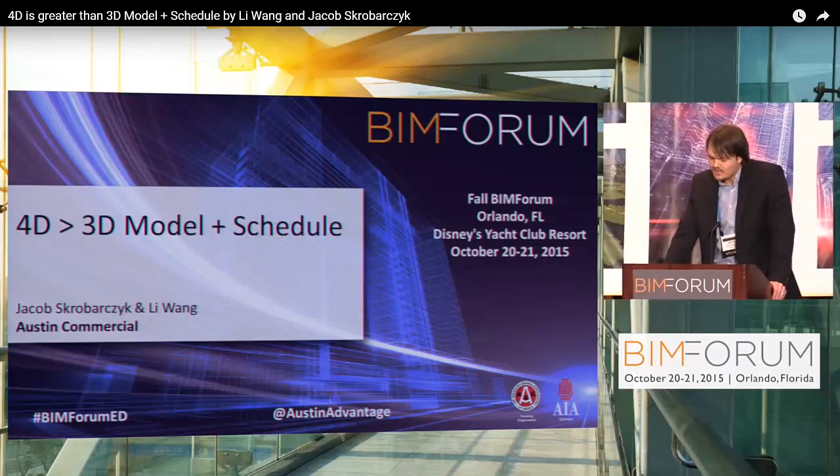I'm the VDC manager for Austin Commercial Central Texas Division. I'm a civil engineering graduate from the University of Texas, and I've been with Austin Commercial for 8 years. I credit the timing of the start of this movement, the BIM Forum, with really jump-starting my career. I've learned a lot from these events. I actually attended John's BIM 101 course in Dallas in 2009. And the BIM Forum has always had an impact on me, and I'm hoping to return the favor today.

My name is Wang. I graduated from the University of Texas at Austin, and I met Jacob 2 years ago at the Austin BIM group when I gave a presentation on my research on design coordination and how to manage knowledge in design coordination using data mining.

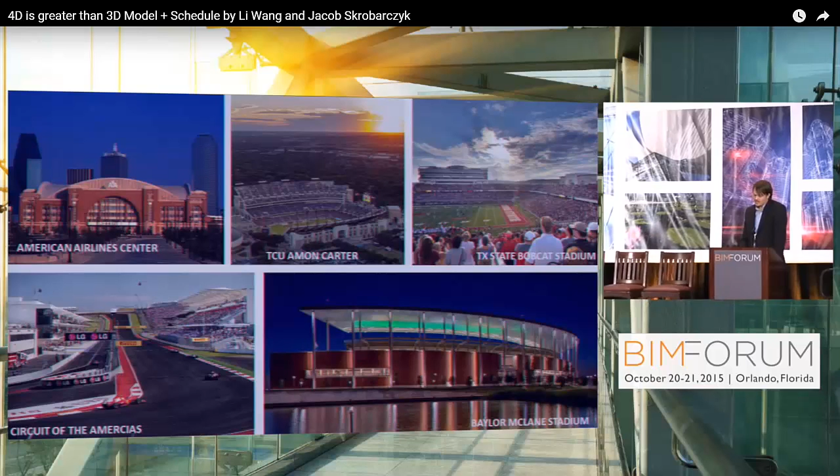For those that aren't familiar with Austin Commercial, we are one of the largest CM firms in the nation, in particular Texas. Our parent company, Austin Industries, which includes commercial, bridge and road, and industrial, put in place about $2 billion worth of work in 2015. We built the only F1 racing facility in America, the Circuit of the Americas. We built the largest replacement hospital in the U.S., and we're currently building the largest commercial build-to-suit project in North Texas for Toyota.

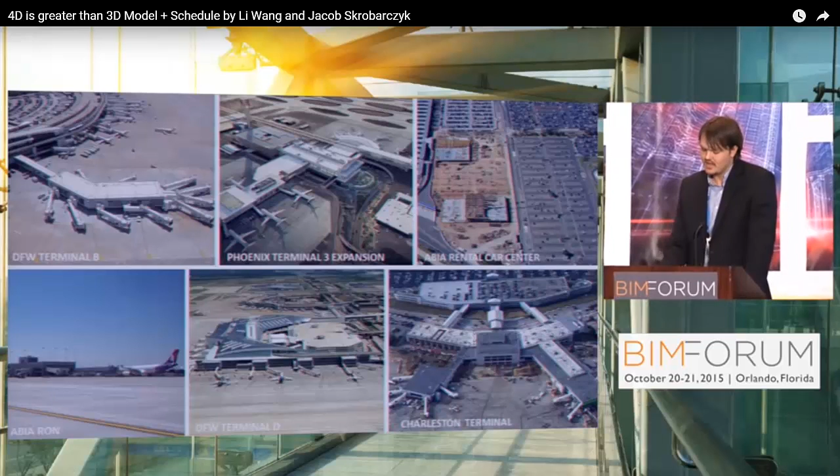We're the third largest aviation builder in the U.S., and we're using 4D to visualize the schedule, and it's really transformed our ability to communicate.

We're going to show today how 4D visual planning tools and practices impact pre-construction in several rapid prototypes or rapid fire case studies and demos, from communicating microschedules to our bidding subcontractors to collaborating with designers on just-in-time design.

We are finding new ways to use 4D for everything: planning org charts and managing resources, reviewing air rights and license agreements, and collecting data to help build better schedules by tracking progress visually and analyzing productivity.

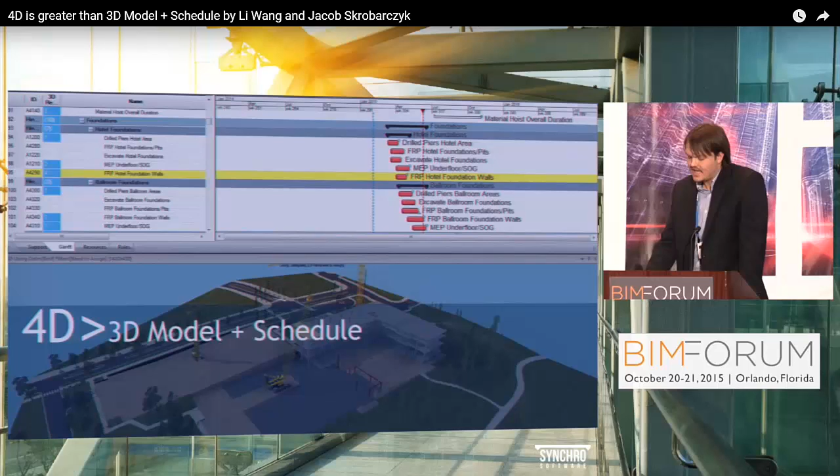Finally, we will argue that the power and future of 4D is not simply linking the schedule to the model and watching it. It's taking that visual reference point and then analyzing other project data over time in relation to that reference point.

So we'll go through several case studies. One of the unique parts of these case studies is that they're all within a 30-mile radius of Austin. As we progress through the case studies, you'll see how we built up our 4D portfolio by adding one building block at a time.

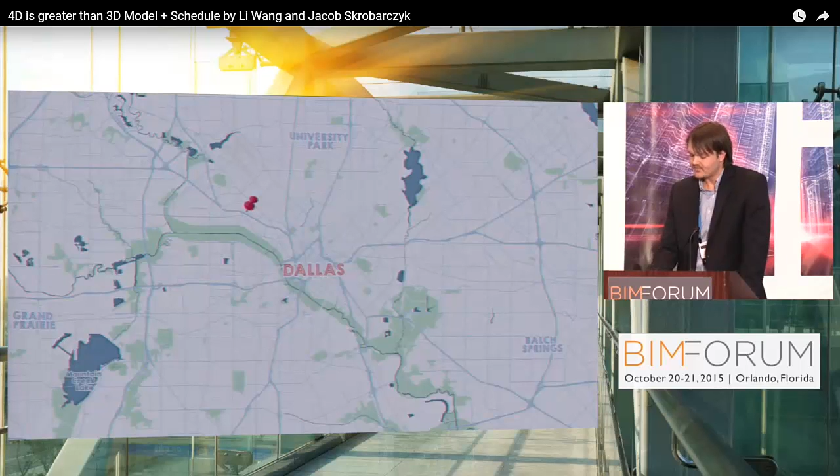Before we get to Austin, we'll show you a project in Dallas that really provided inspiration for our future work on 4D. That's the new Parkland Hospital in Dallas. In this example, it includes a few critical building blocks for successful 4D, a virtual mock-up, and heavy field participation. So 160 feet in the air, from levels 10 to 12, we have walls that span 120 feet and then end in this dramatic 60-foot cantilever. We define this as an area ripe for virtual mock-up, and it's a really high-risk condition.

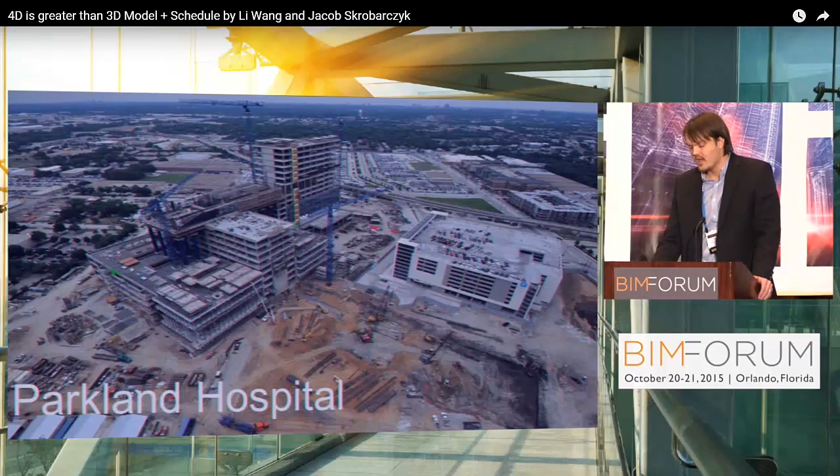We have 1 million pounds of rebar, and the cantilevered PT walls at Parkland are something that we wanted to focus on. So we actually hired a consultant, and they modeled the PT and rebar. But what's unique about this situation is that this rendering, the false work, all the scaffolding, was actually created by our field engineer, unbeknownst to our VDC department.

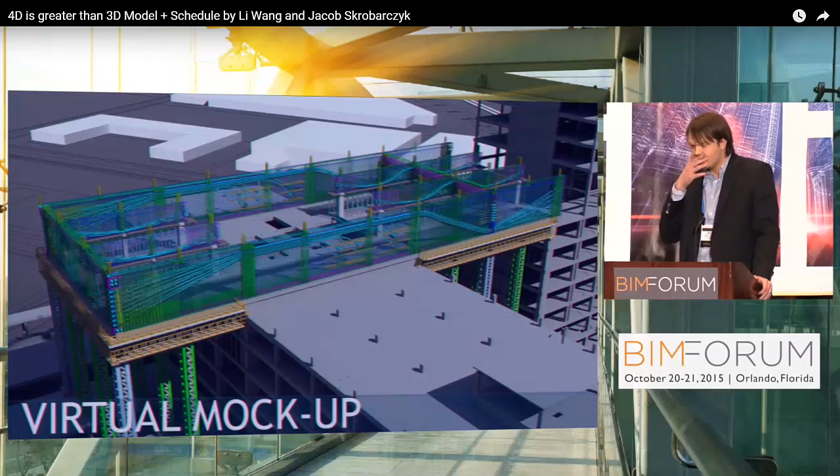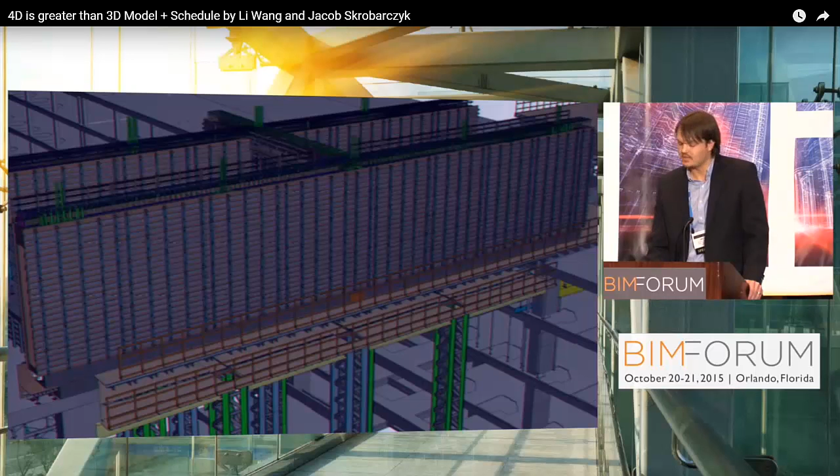It was an example where we had a guy on a project site that started to see what the power of 3D coordination is, and then took it one step further and decided, hey, I'm going to create this visual, create these animations, and then run through how we can build this in the field to improve productivity and really make sure he got it right from a field engineering perspective. I was really surprised because I struggle to make renderings look this beautiful, and this is a field engineer that kind of busted this out of nowhere.

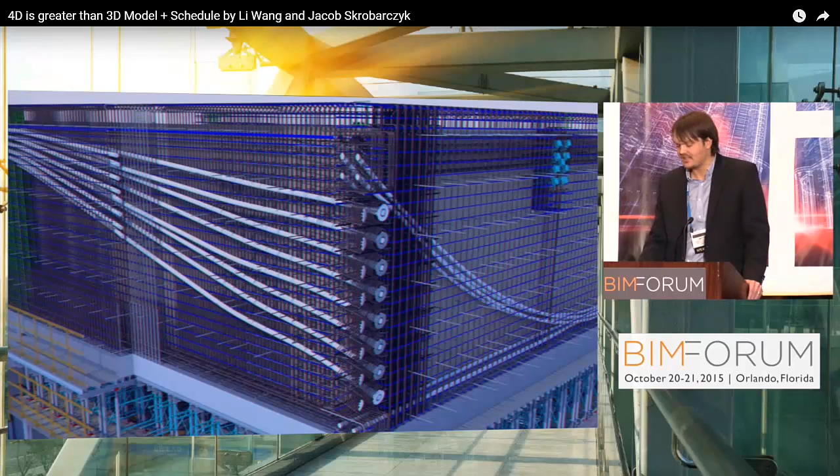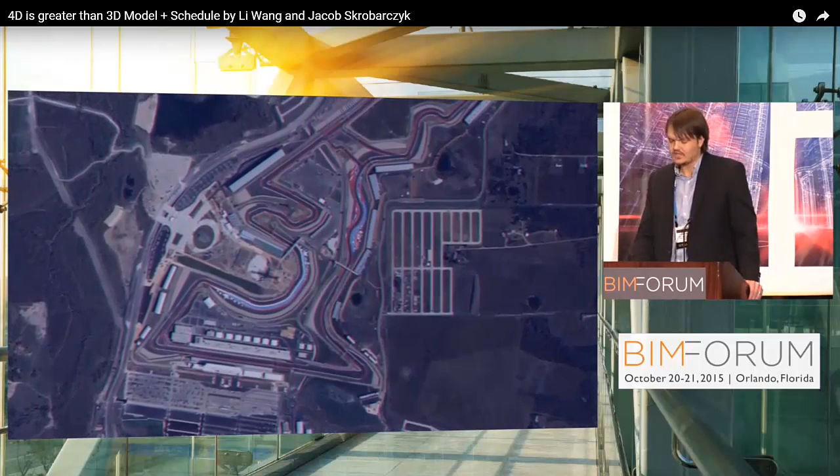So using that as inspiration, I started working on a project, the Circuit of the Americas, just southeast of the airport. For those unfamiliar with the project, Circuit of the Americas is a 1,500-acre sports and entertainment venue just southeast of the Austin airport. It's the most Instagrammed location in Texas. It's home of the X Games, Formula One, MotoGP, and a massive outdoor amphitheater.

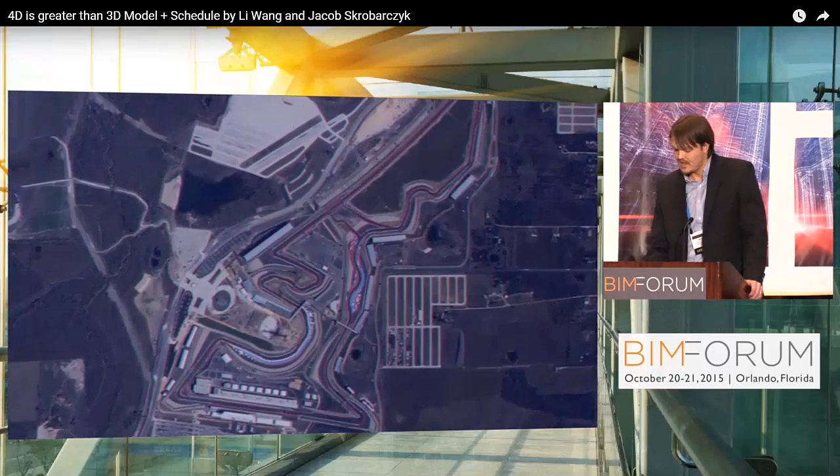The facility has capacity for 120,000 people, and it's the only purpose-built F1 track in the United States. This Sunday at 3 p.m., there's a race, the 2015 Formula One U.S. Grand Prix, on NBC.

Once the project got the green light, we were really schedule constrained. It was in October 2011.

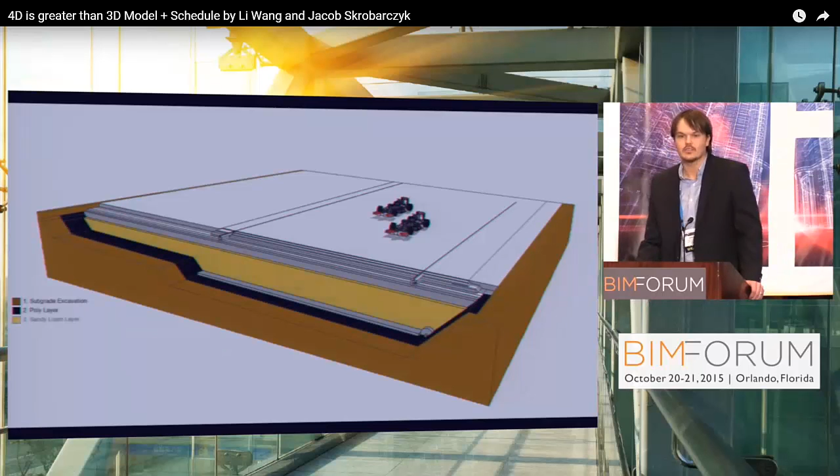We had 13 months to get race day ready. On this project, it was pretty easy to define what the high-risk repeating condition was. It was the 3.4-mile circuit track. We modeled every level of the track to discuss and define scope responsibility with our subcontractors, look at sequencing and durations.

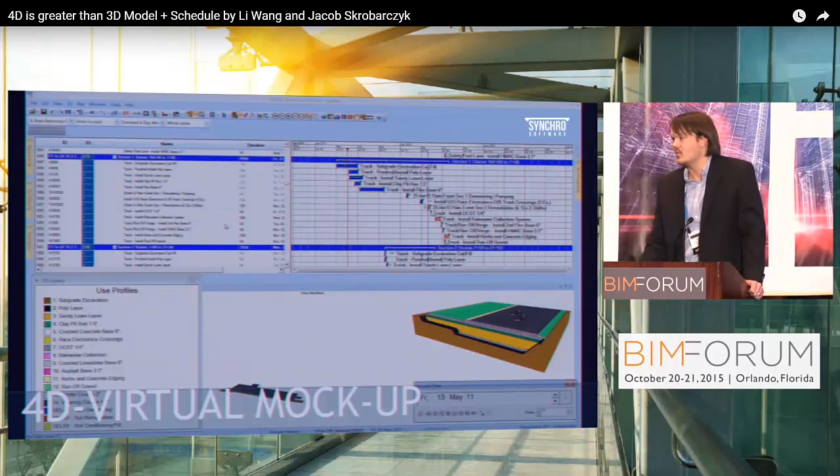One of the things we did, taking it one more step, was we tied the color-coded layers of the virtual mock-up to the schedule so that all team members could see the complex track design and understand if we were on schedule or behind schedule.

We were hit by heavy rains in January right before the track, and we were able to visualize within the animation when we were hit by rains, as you can see in blue, and then us recovering from those rains, and resequence construction so that we knew we could finish by race day. We were able to show ownership we would make it for that first race.

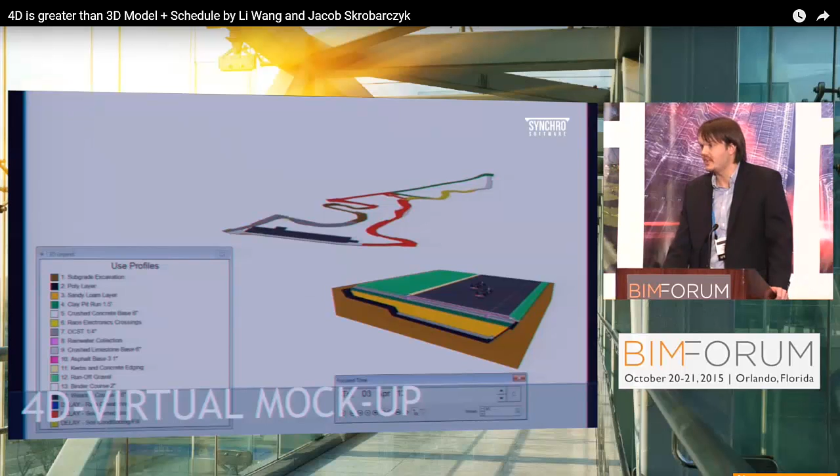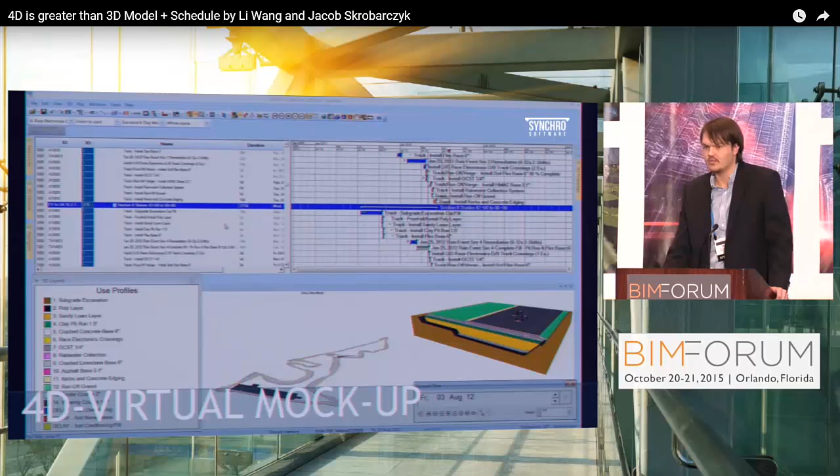Using these tools, we were able to create a job site environment where everybody was in an incredibly relaxed situation for having so much at stake.

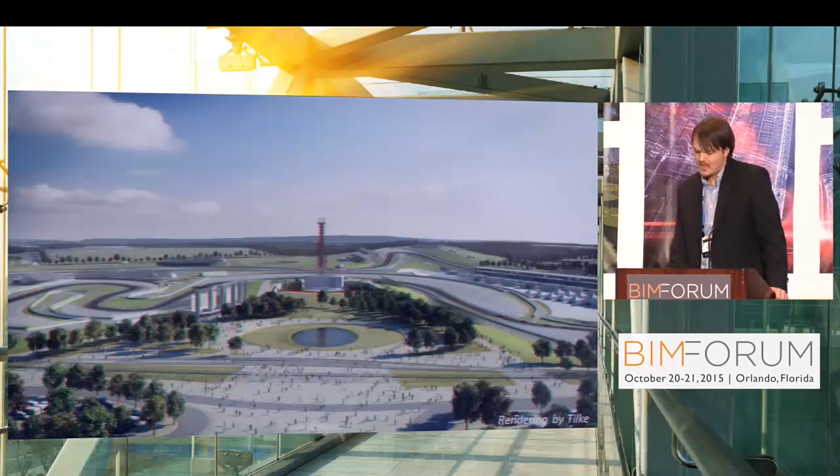While our virtual construction team was finalizing the coordination and planning the recovery schedule on the track, a major component was added to the project. We were challenged to build an outdoor amphitheater, concessions, and a 251-foot observation tower, and we had to do it all, design and construction, in 8 months.

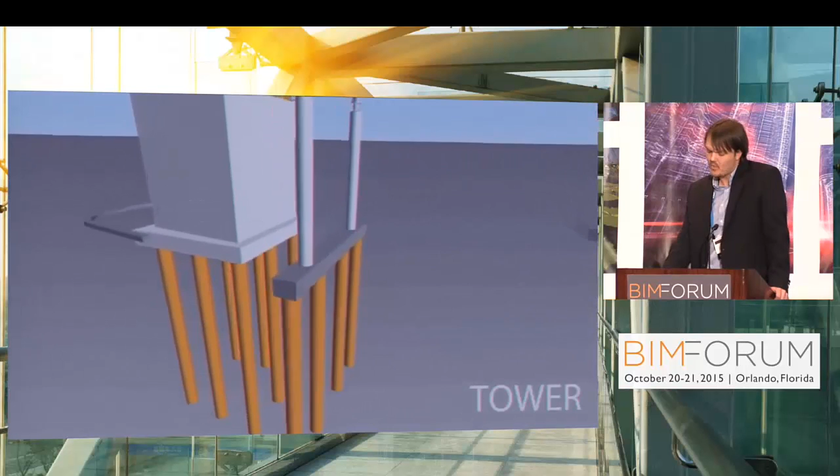So we worked with Walter P. Moore, and Walter P. Moore took the Miró Rivera design concept, which is basic geometry, and created a fabrication level model.

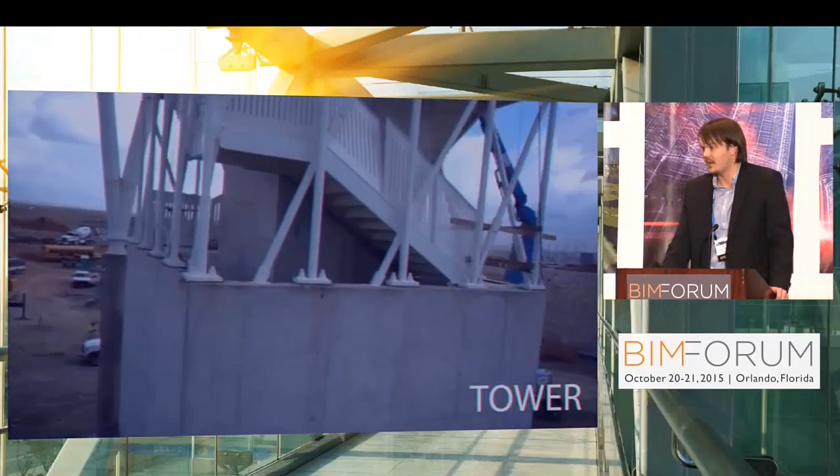We used the model to greatly improve communication and completely eliminate redundant detailing. We were able to save 6 weeks by cutting out the paper shop drawing process. With an over-the-shoulder review by our fabricator erector, the team took the design from basic geometry to fabricated steel on site in just 12 weeks.

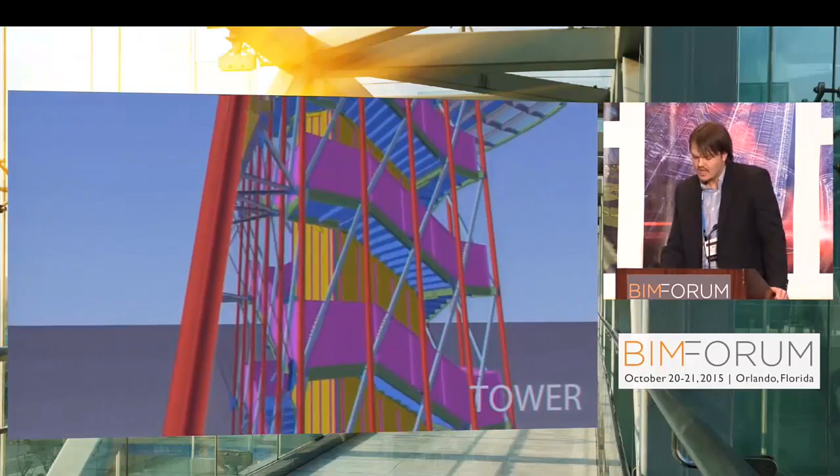The inclusion of that fabricator and erector in the design process was critical. Patriot Erectors provided feedback on what members were readily available and what connections they preferred for rapid assembly.

Ultimately, when we finished the project, we completed both design and construction in only 8 months, plus we had zero change orders.

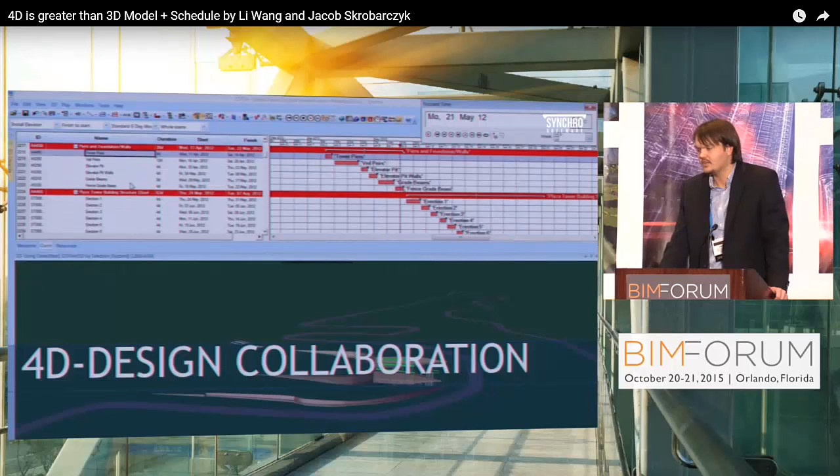Throughout the process, I was involved in the meetings to see how electrical, lighting, and all the additional smaller MEP components were used. But with our design team going all the way to a fabrication level, it really allowed me to start experimenting with using 4D on the tower in that amphitheater area.

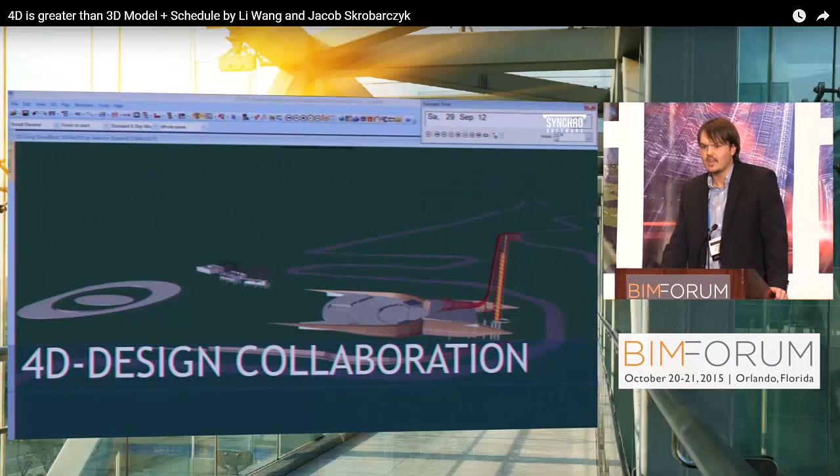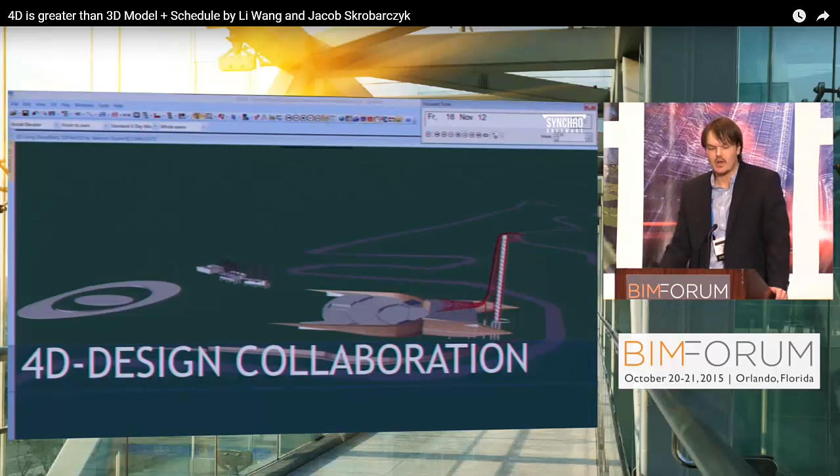Once we started showing the animation to the designers, Walter P. Moore indicated that they were actually a little bit behind on the veil design, and they needed to speed that up. We were working on the 7th module for the tower. This tower is erected in 10 pieces. If we would have erected that 7th module, the tower could have actually fallen down because of it.

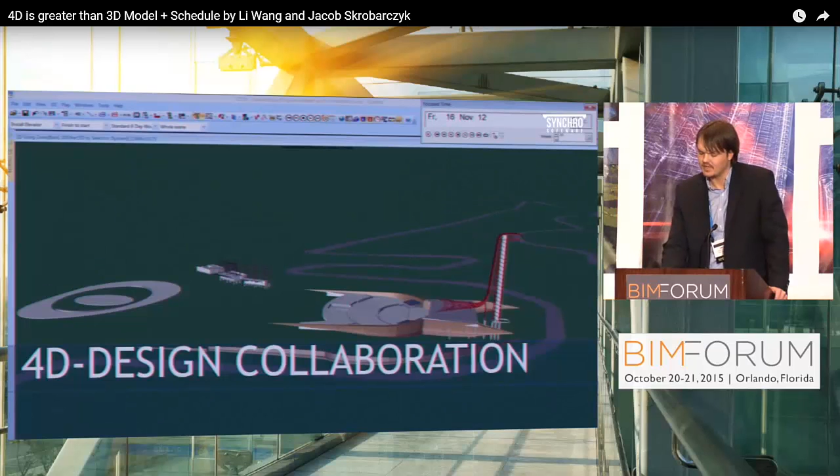They were able to accelerate the veil design schedule after reviewing the animation, and it really helped make sure this was a success. A lot was at risk for this to be completed in time for the first race.

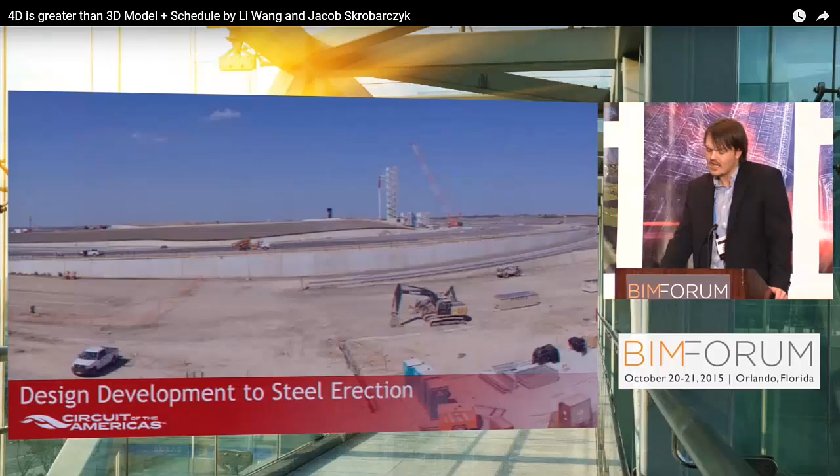With the steel on site, we assembled the modules of the steel lattice diagrid tower and erected it in 10 pieces. In early November, we completed construction of the distinctive red racing stripe veil, and it was available for the first race.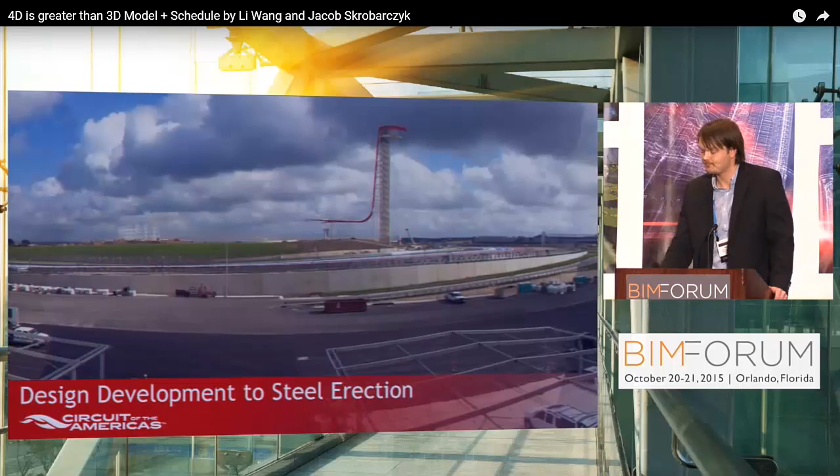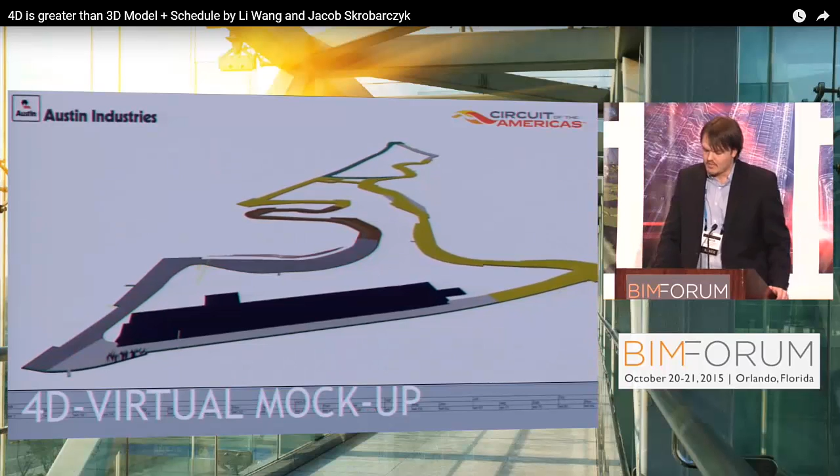Using visual planning tools, we were able to recover from extreme flood events to complete the facility on schedule for the 2012 race. The FIA, the governing body that oversees international motorsport, approved the circuit in late September 2012 for Grade 1 status, the highest distinction awarded to a motorsports venue.

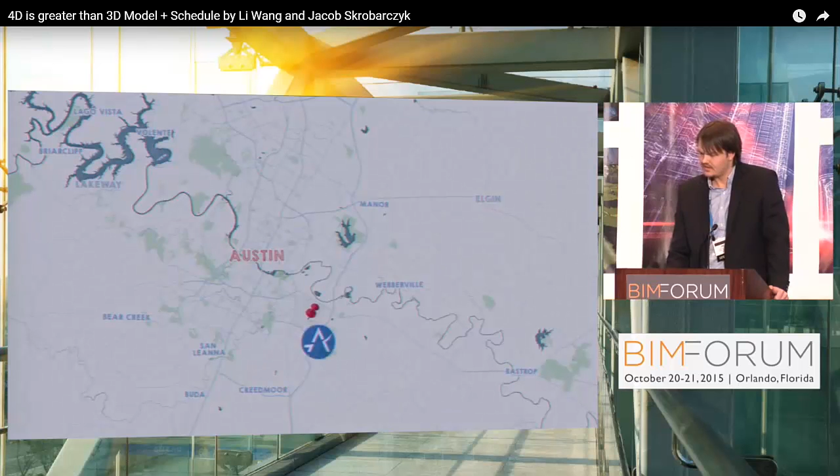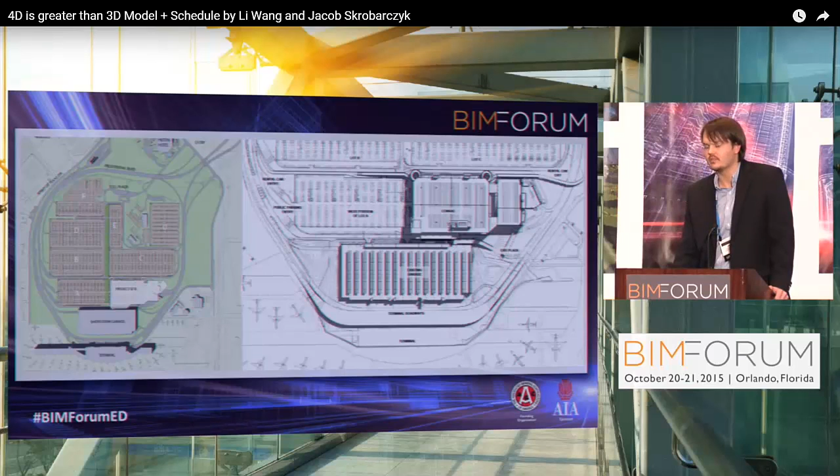So the team from the Circuit of the Americas went down the street to the Austin Bergstrom International Airport to work on a massive rental car center. We really wanted to apply all the same tools. It was an incredibly different type of project, but we wanted to keep the momentum we had built through that project. So one of the things we did is create a tower crane sequencing animation.

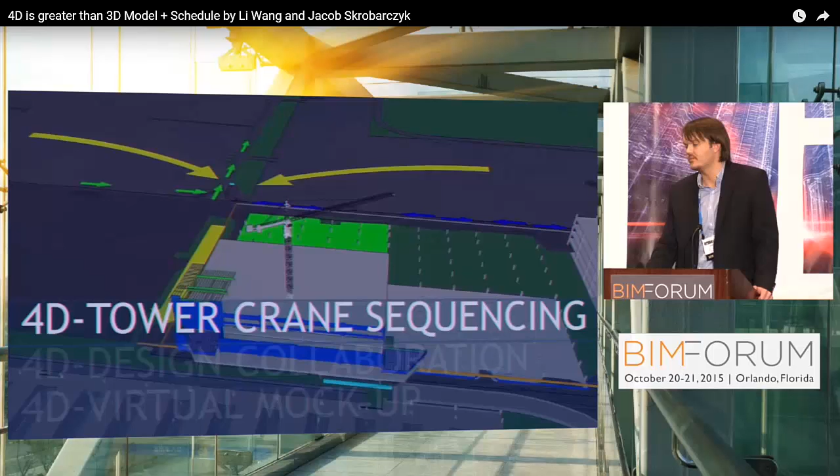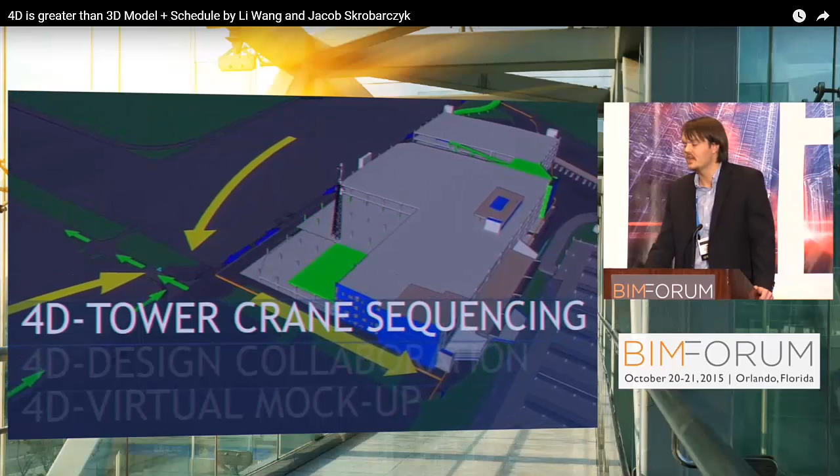The complex part about these projects is that you end up building them in zones. We created a tower crane sequence with 2 tower cranes making 3 jumps each time. We went through it with our superintendent and with the parking management at the airport. One critical thing is that to dismantle the crane to the bottom of the screen, we would need to shut down a roadway tying right into their toll booths. So the superintendent resequenced the work and came up with a sequence that made sense. We were able to time it so that if you're erecting and dismantling cranes 6 times, that erection and dismantle number goes way up.

So what we were able to do is time it so that we were dismantling and erecting a crane at the same time that we were dismantling and erecting another crane. We ended up saving $20,000 to $40,000 just by adjusting the sequence, getting a little mobile crane out there for a couple days and using it for formwork installation while we get going.

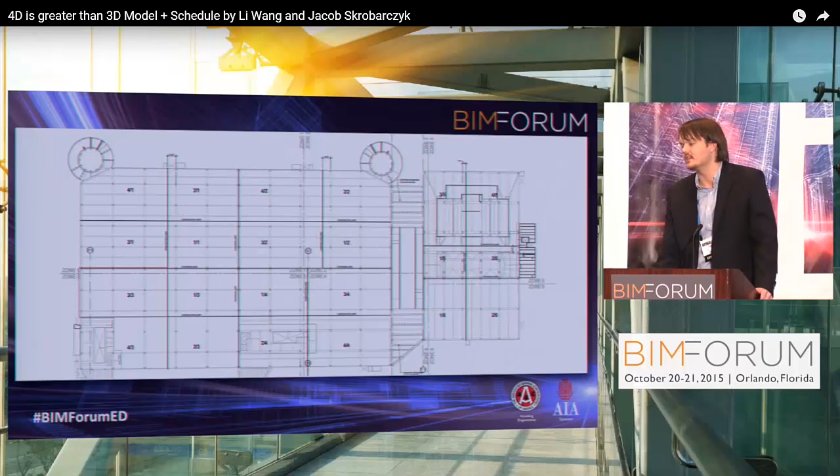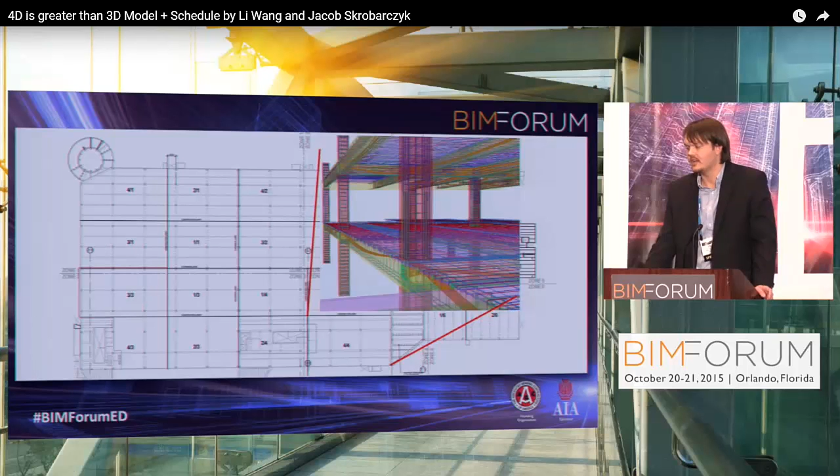Similarly, we identified a virtual mock-up case here, really a repeating condition. We have 5 levels, 1 million square feet, broken into 6 zones, with really four pours per zone. So the idea is this is the equivalent of like a 120-story building, except it's repeating and going horizontal. We modeled PT and rebar, identified how we would build one small section, and that informed productivity on the rest of the project.

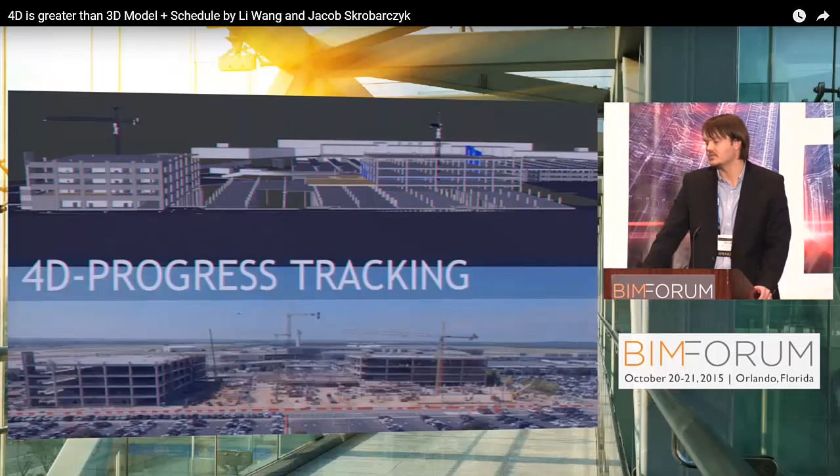Throughout the project, our superintendent was able to look at the schedule and compare our webcam versus the animation, and really force our subcontractors to stay on schedule, letting them know when they're ahead or behind schedule. We were able to do a great job of keeping that on track.

And then now, as that superintendent works, he's moved on to a similar project at Tampa Airport, and he's using this model, this 4D sequence, to inform the new VDC coordinator on that project on what he wants it to look like and how he's going to use it.

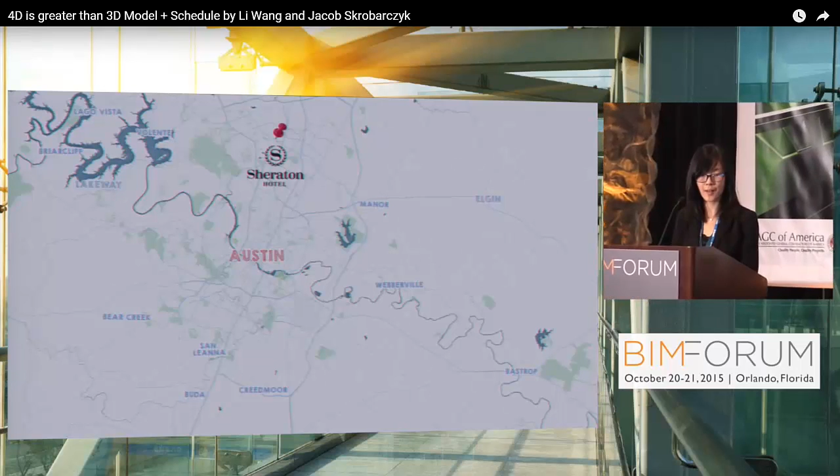Okay, so building upon the success of previous applications, we moved one step further on our next project, the Sheraton Hotel in Georgetown, 30 miles north of Austin.

On this project, the developer was particularly interested in reviewing the staffing strategies over time. So we incorporated the staffing information into the 4D simulation, and the visual creates transparency for the developer to understand where and when we spent money on staff.

On the other side, our regional manager was able to create a cost-efficient plan to adequately staff the project using this schedule visualization as a reference point.

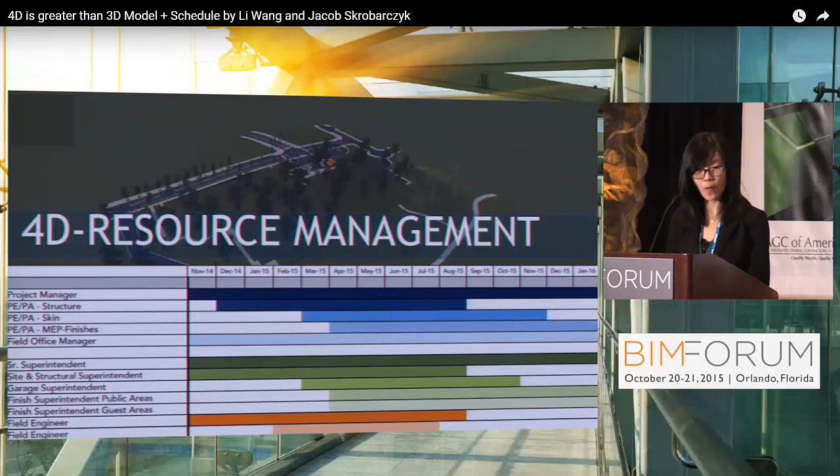Future plan is to apply 4D resource management on all of our projects to facilitate better communication with the client, improve feedback from and to the field, and also increase the overall predictability and efficiency in resource allocation.

And on our next project, we faced some new challenges in the Austin downtown area. The first challenge that we came across is to get the tower crane license agreement.

This is a traditional 4D animation that we created for the project. The city is concerned with the impact of tower cranes on pedestrians, transportation, and surrounding buildings. Our project manager spent months back and forth with the city trying to get the license agreement before he came to us for help.

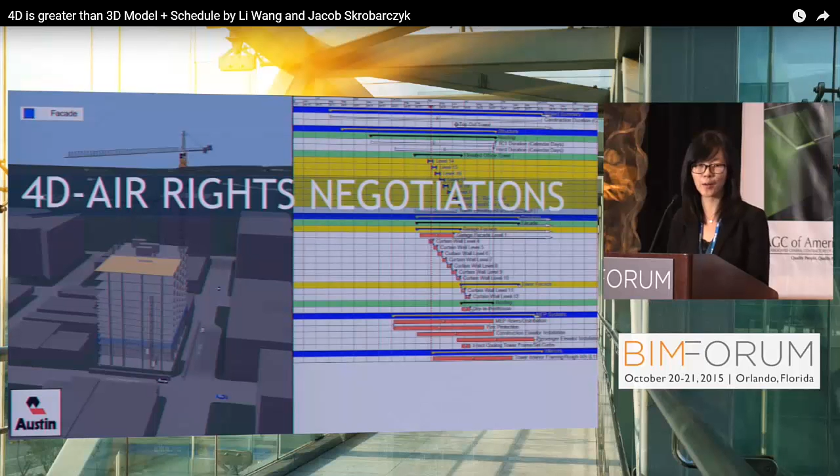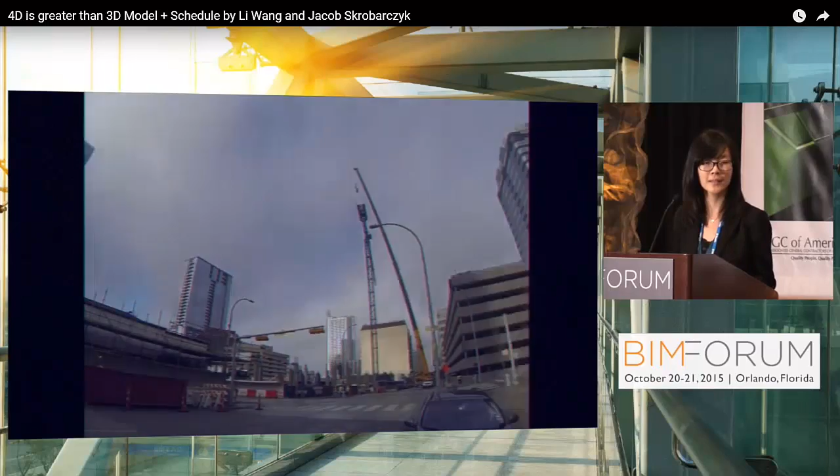So the previous animation wasn't good enough to show the tower crane movement, so we created this short and sweet 4D animation showing the maximum swing of the tower crane and the typical movement of the jib. Our project manager got this to the city, and we had our license agreement in hand within a week. And this is the tower crane being assembled on a lovely sunny day.

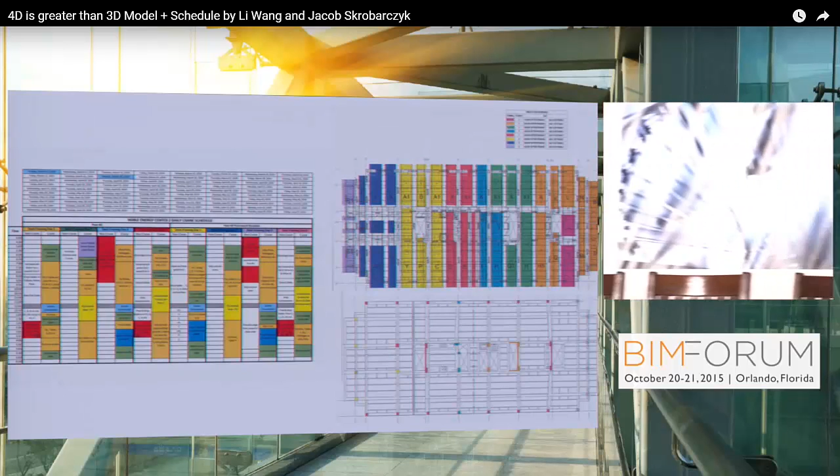So one of the other areas that we like to use 4D is in really planning formwork installation. We do a lot of self-performed formwork. This is a crane use log and really a formwork layout plan.

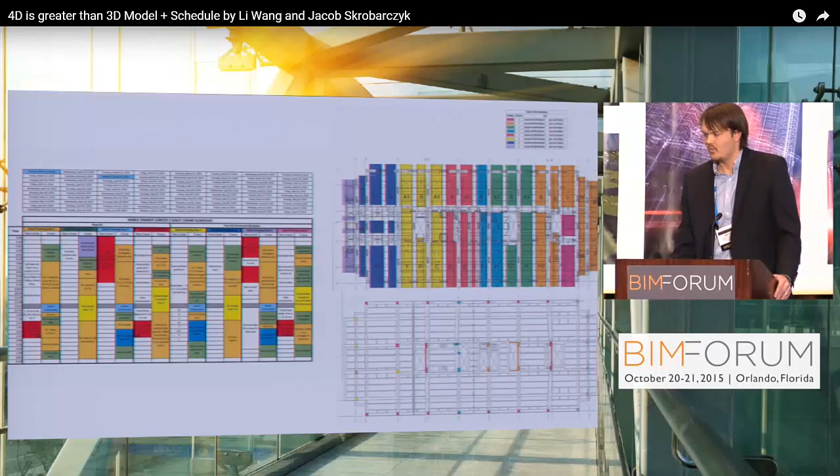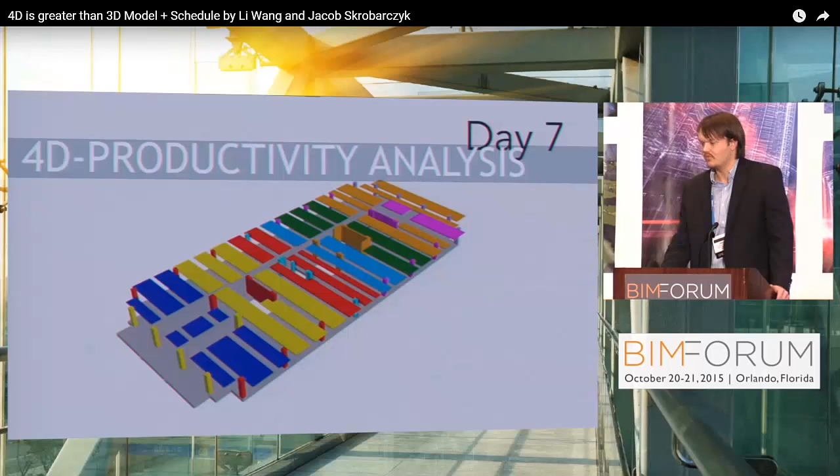What we're looking at here is trying to understand how our projects in Houston are getting really 3,600 square feet a day for structural productivity. What we're getting quoted in the Austin market is closer to 2,200 square feet a day, and trying to understand why that is.

So we started off by taking their formwork drawing and trying to make a clear visual of how they're doing it. And then we thought originally that we would just go to our formwork subcontractors and tell them, hey, you need to produce like this. Here's a visual, produce it.

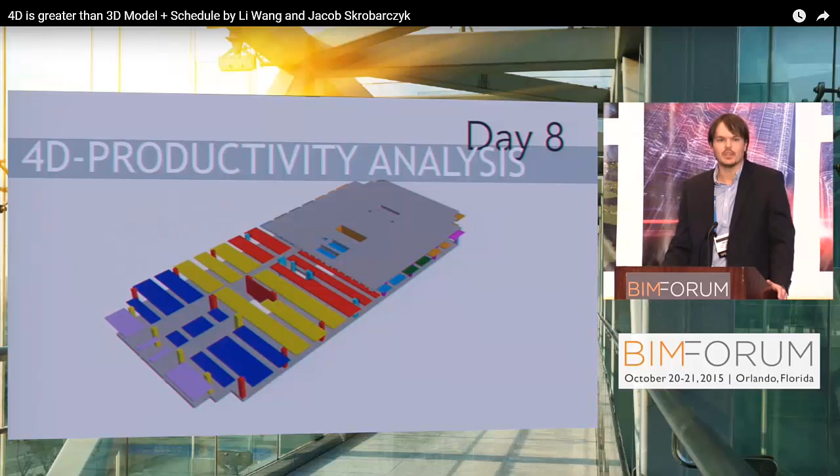And what we were able to figure out is that it had a lot more to do with shortage of labor and demand for workers, shortage of skilled labor than it did really anything that we could produce for them. The other piece is that they had questions outstanding. They had issues with beam schedules and rebar details and how to figure out how to put the structure together.

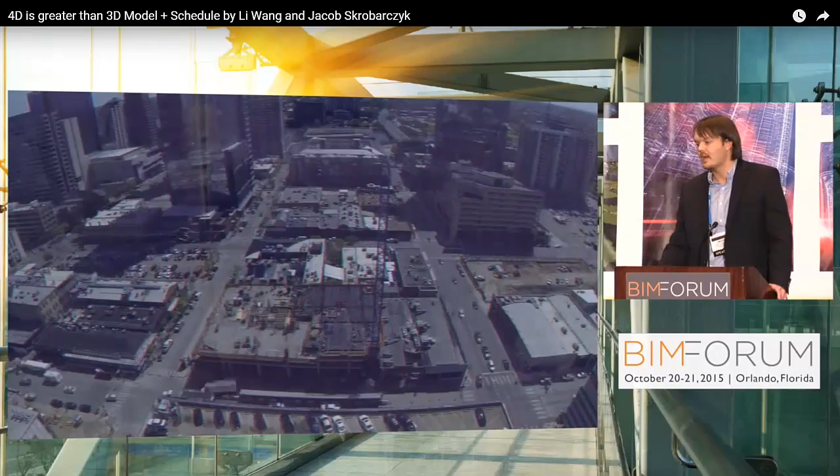So with our self-perform team, we're actually taking the time-lapse video and using it sort of like a game planning strategy. And so compared to our competition in the market, we're able to do about 2,900 square feet a day, which isn't fast by most standards, but within that marketplace, we're beating the competition by about 30%.

And so our formwork project manager really believes in the use of the model. He's an active virtual builder, and we're building structural models and finding those issues early. And it's really a way that we can really improve our productivity.

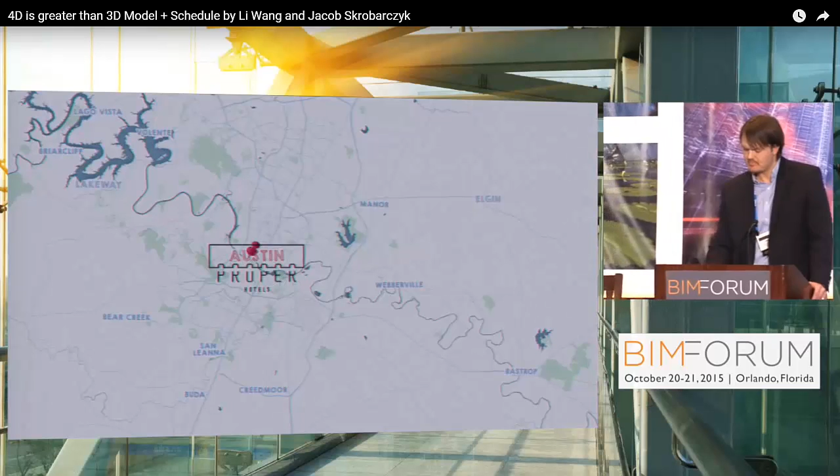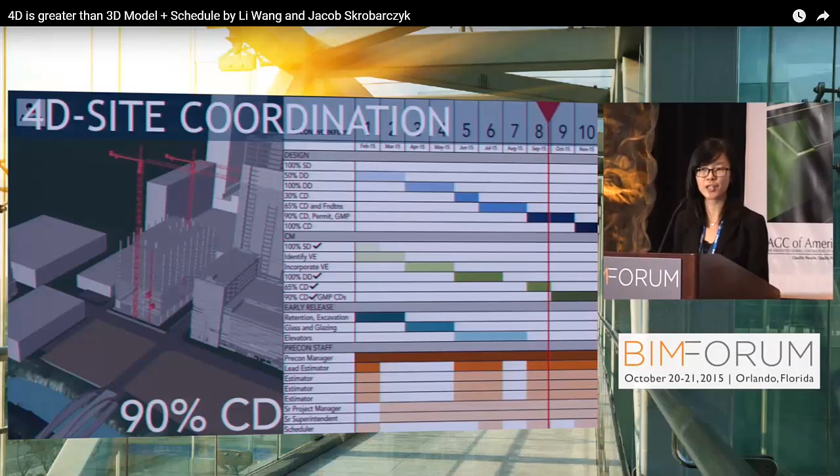So the midst of construction going on in Austin downtown is reshaping the city for the next decade, but also creating extreme challenges in construction. And so we're spending a lot of time trying to understand the site condition, our surrounding buildings, and trying to coordinate with our adjacent projects for tower crane erections and sequencing.

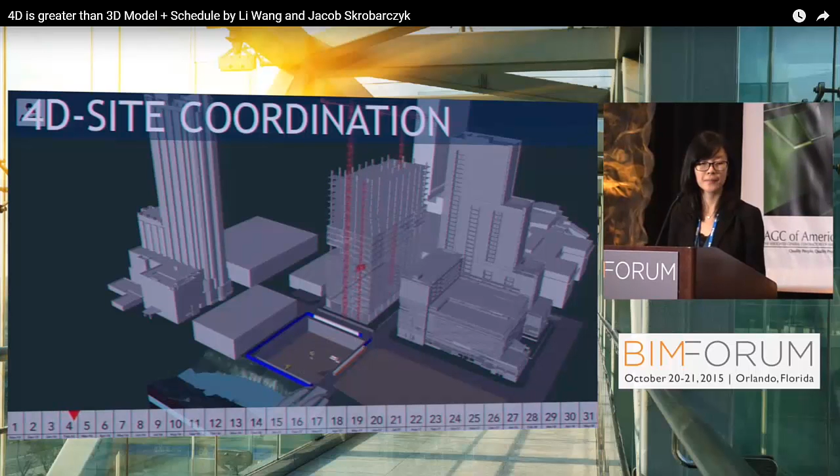And so in this animation, when we pursued the project, we put together this animation. We had multiple projects going on. We were looking at really tower crane placement in relation to the other projects. In a 2D perspective, it was really hard to tell when cranes would be there.

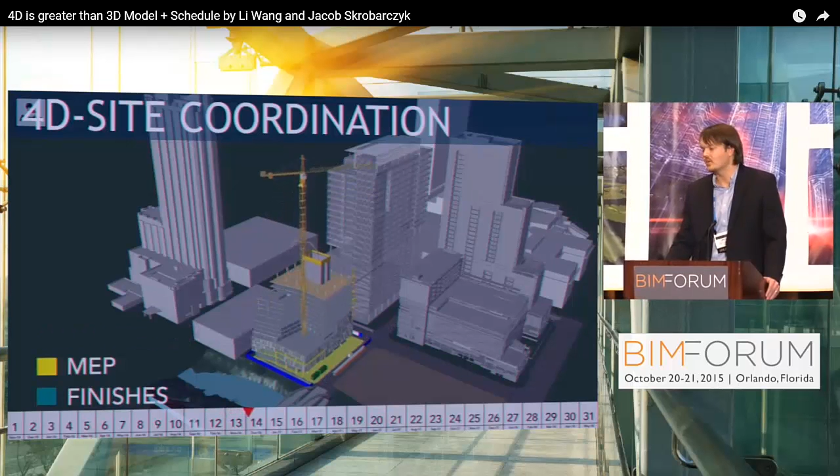We just got dumped with, here's logistics plans, here's schedules, go. So we were able to come up with a plan that worked. It seemed actually pretty easy once we got into it. And then once we were awarded the project, we set up a meeting with a developer that was working on a project just to the north of it.

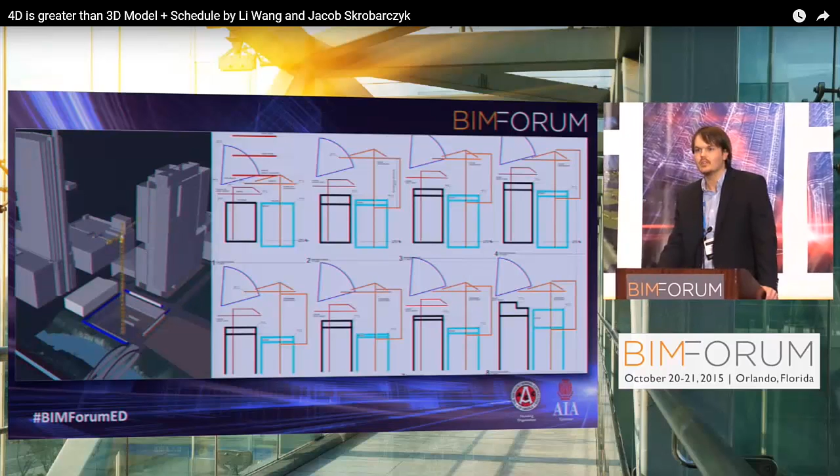They said it may concern you. So once we got their schedule and their logistics plan, we realized that although we started our project earlier than they did, we'd be 4 levels below when they were starting theirs.

And really they were using some productivity numbers that we would see more like in a Houston market or in a different market. So they're flying up with their structure and using 2 cranes, the lower crane, which would hit us if it was weather vaning.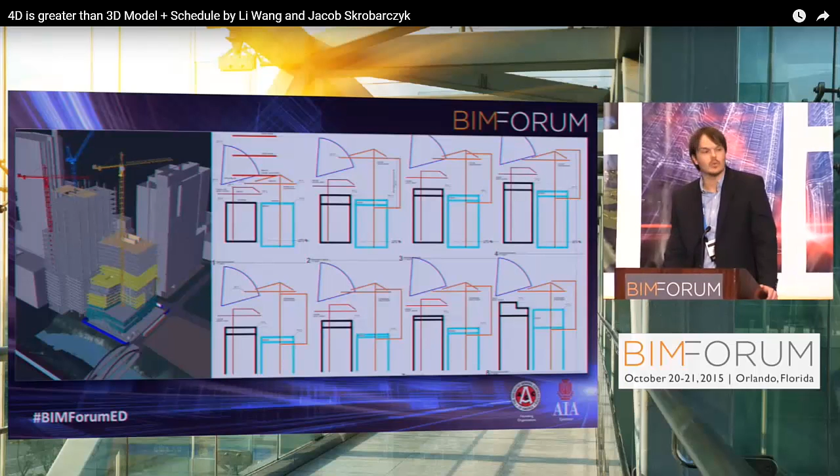So we had to go back to the drawing board, spend a lot of work on these sort of cartoon sketches to understand where we would be over time, and then use that to really plan a jump sequence that would work with their adjacent property and have our superintendent go into it with open eyes on what the challenges are to the project.

To summarize, our understanding of 4D is not only using the 4D simulation to represent the schedules, but also use it as a platform and a reference point to incorporate data for different uses.

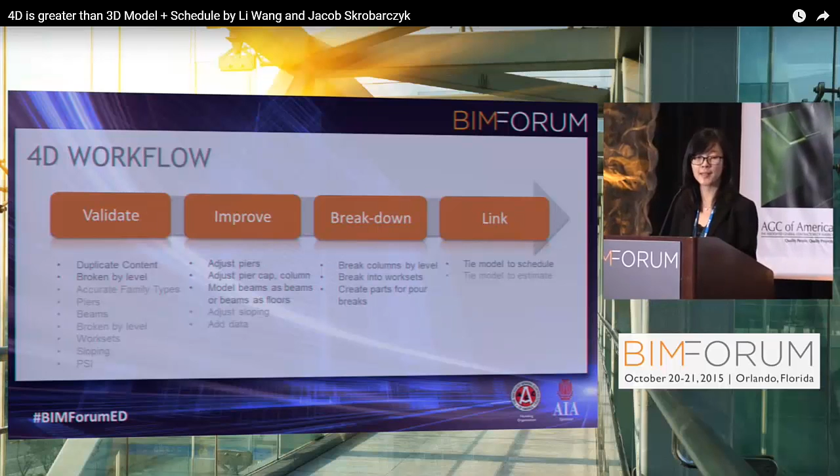And here is the typical workflow we developed for 4D. We broke it into 4 steps: validate the model content, improve the model, break down the model into the details that you need for your use cases, and link the schedule to a model. And this can be repeated as the model updates and the schedule updates.

And here are some best practices. First, important to identify the use cases you want to test out. And it's always good to test out one application at a time. Once you identify your use cases, it's critical to define the level of development of your model.

And the next important lesson learned is to determine the update frequency of not only your model but also your schedule, because the models and schedules always change. So that's one thing to keep in mind. And the last but the most important is getting more involvement, not only inside of the VDC department, but also outside of the department, from the field guys, from the project managers, project engineers.

And one of the examples of this attempt is trying to incorporate the safety data into 4D. This is research being developed by Sooyoung Choe and Dr. Fernanda Leite at the University of Texas at Austin. They are trying to utilize and incorporate this safety risk data into the schedules and showing the risk levels of work zones in 4D.

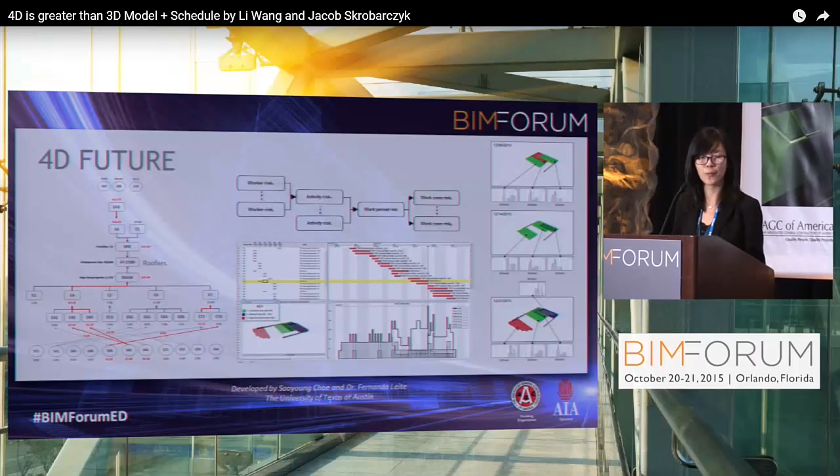And here's the animation that they created for one of our projects. Different colors show different levels of safety risk. Red is high risk, blue is medium, and green is low risk.

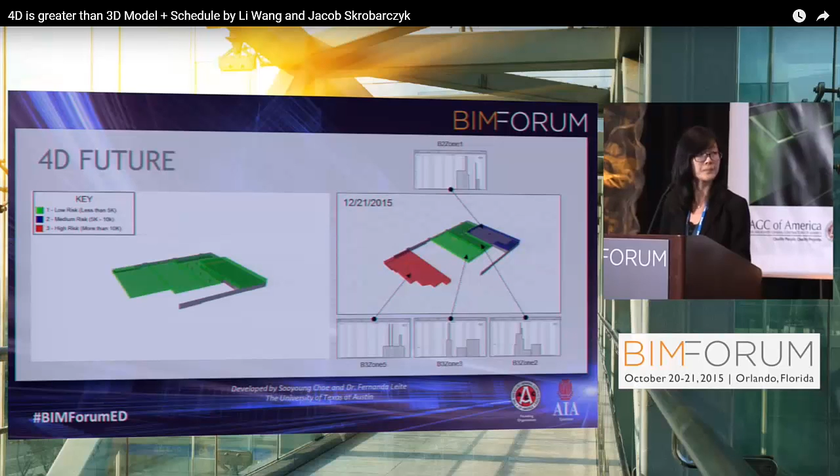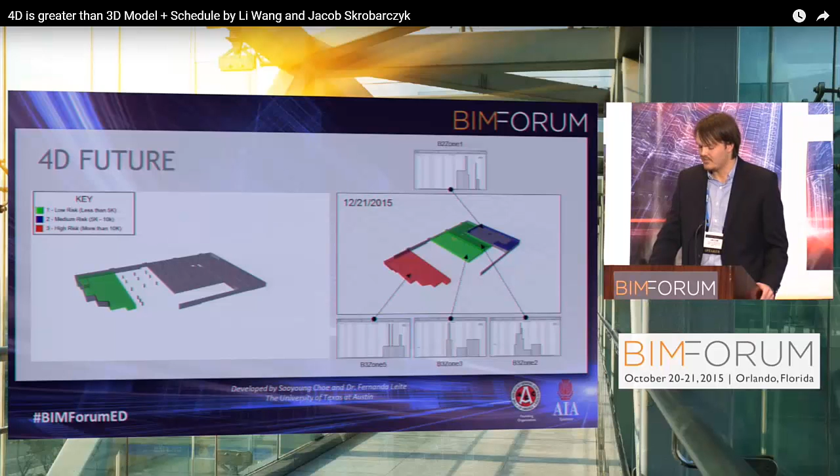I think the main point is that the future of 4D is not just building a more beautiful visual, but including more information in reference to that visual and tailoring it to multiple viewers' perspectives. That way we can get the buy-in that allows it to be used on every project and really drive value out of the process.

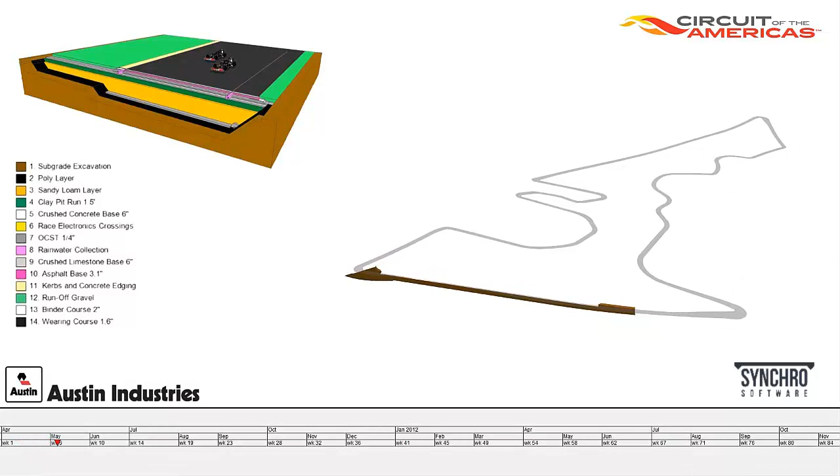So I'll let you know it's not consistent on all our projects. It really depends on superintendent buy-in and how critical they think the process is. On the Circuit of the Americas and the CONRAC, that superintendent loves technology—he lives for construction and technology—so it's really easy to do.

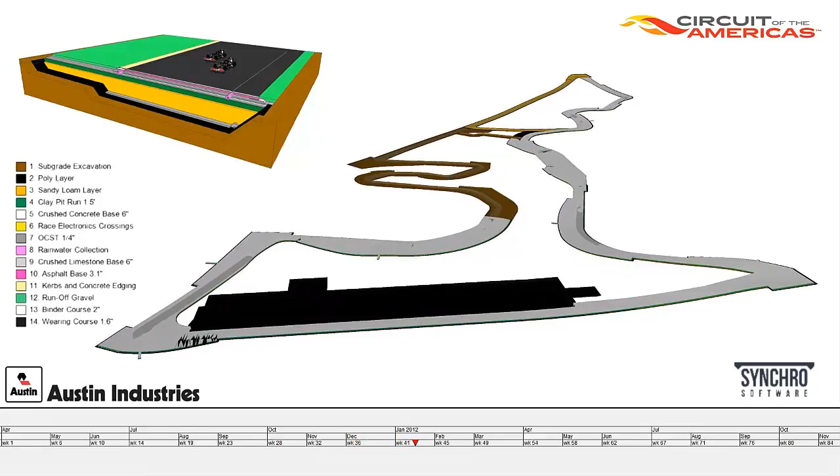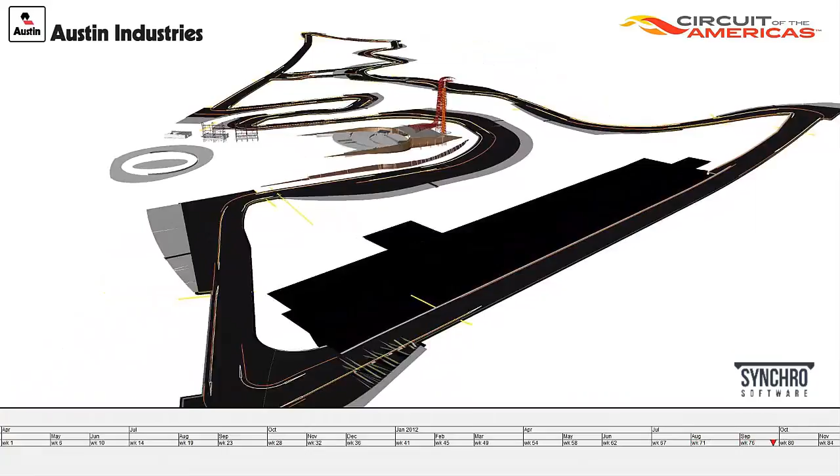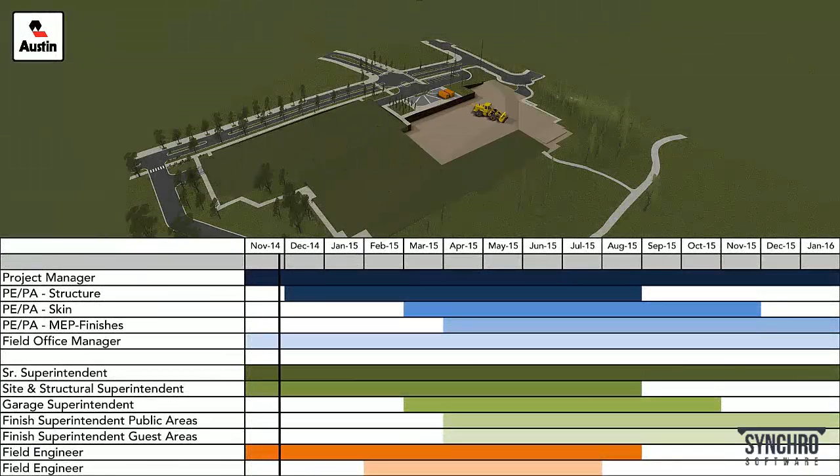On other projects where we had less superintendent buy-in, we kept the model level of development low and just scheduled the activities we were tying the schedule to at a high level, trying to get as much benefit as we could. That's the Sheraton Georgetown project, just outside of Austin—a hotel where we had resource management. Really, the developer asked for that information, but we were trying to get more buy-in and more people to use it, because that would validate the amount of time we spend updating the model for the schedule.

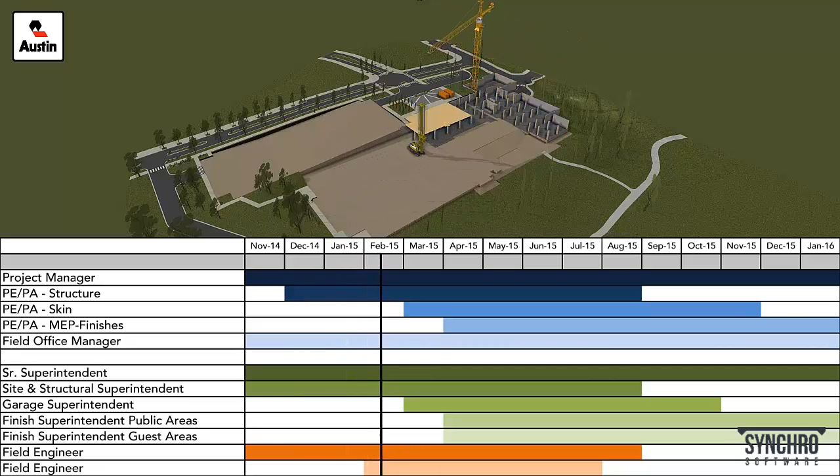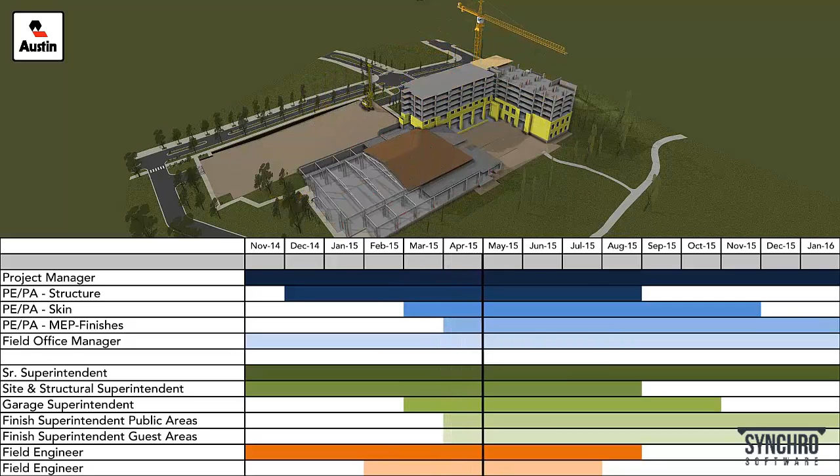So all I can say is that you kind of have to gauge it project by project. And if you can find those teams that want to use it, focus your time on those projects.

What about the types of schedules you were maintaining? So let's say we get more buy-in across a company—enterprise-wide, everybody wants to do this as long as it's a BIM process. The duplication of the schedule—did you find that to be tedious work?

Can you define duplication of the schedule? Well, Primavera versus a 4D schedule—you wouldn't really be able to visualize the detail inside a Primavera schedule when it comes into a 4D model. You don't have everything inside; those tasks translate over to a 4D schedule, so the two schedules end up being essentially different.

So I'm not sure if you work for a software company. Construction, and now software. Okay.

Well, the tool that we're using takes in the Primavera schedule directly. So whatever my scheduler, who sits right behind me, wants to put into the model, we can put it into the model and visualize it, looking at different activities in relation to the animation.

Gotcha. Thanks. All right.

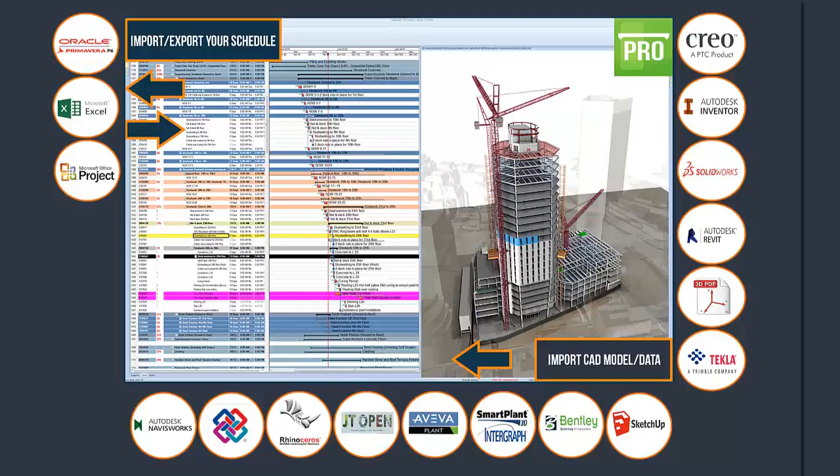So one thing I thought was—I don't know, I'm still thinking about the ramifications of it—but the ability to take a 4D schedule and include activities that, based on some sort of rule either within the name or the use profile of that entity, can assess the risk register from a high incident factor.

That's super exciting, because you think about the work that's going to go on every single day. Instead of just having area superintendents and general superintendents, you can start to look at where the high risk work is going on, or the dollar value of the work combined with the risk, combined with other metrics like quality or need for architectural finish in a given area, to make sure you have a 5-day look ahead, day by day. Am I the only one getting excited by this? And having a dashboard that could allow you to reassign staff based on that day's need for your project? Okay, maybe it's just me. But I think it's cool.

Guys from Austin, what did you do that you were like, you know what, that was a really solid win? The resequencing of the tower cranes so that you were demobbing and mobilizing the tower cranes at the same time, so you weren't literally sending a mobile crane back and forth to the job site. What's the thing that feels like a real solid win?